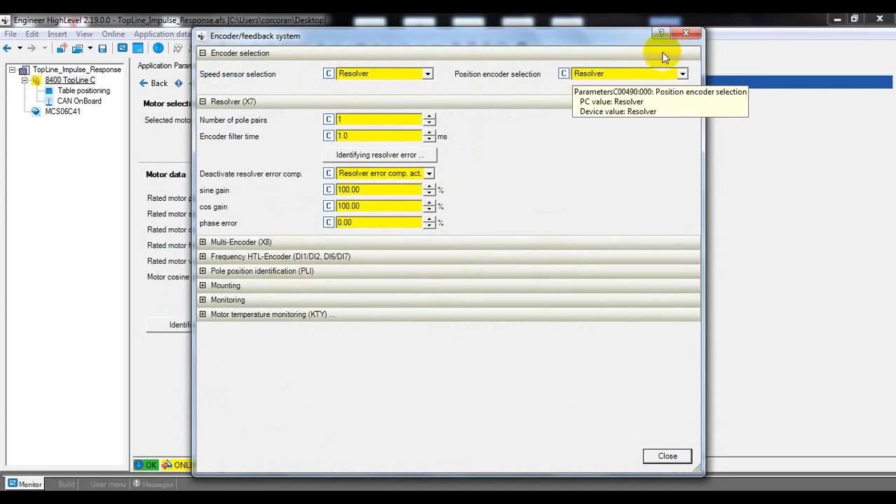So now I want to go ahead and set up my oscilloscope. You're going to see something similar to what I have here. This is a capture with the gains that we currently have. How I set this up is I went down and picked motion control kernel, speed set value A, and motor interface, motor speed actual. I set these up to be 100 RPM per division. It depends on what you have for your actual RPM, but these should match such that they overlay.

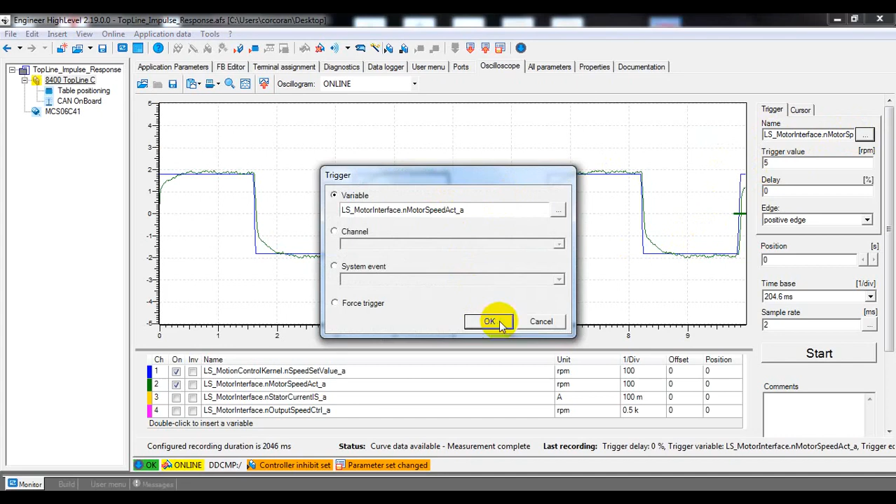Also, you want to set up your triggers. It's not necessary in my case with the repetitive movement, but if you have single, one-shot moves, you'll want to set up triggers such that you capture the movement. You do that up here. You'll pick the variable you want to trigger off of. In this case, it's speed actual. And your trigger value, I picked 5 RPM. It could be whatever you need. And change your edge. So when I'm passing 5 RPM in the positive direction, that's when I trigger. Also make sure you set up your time base and sample rate reflecting what you need.

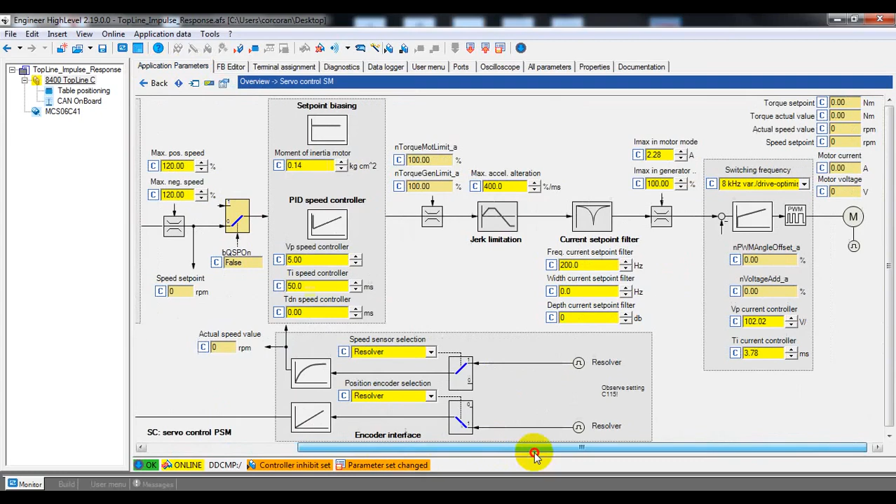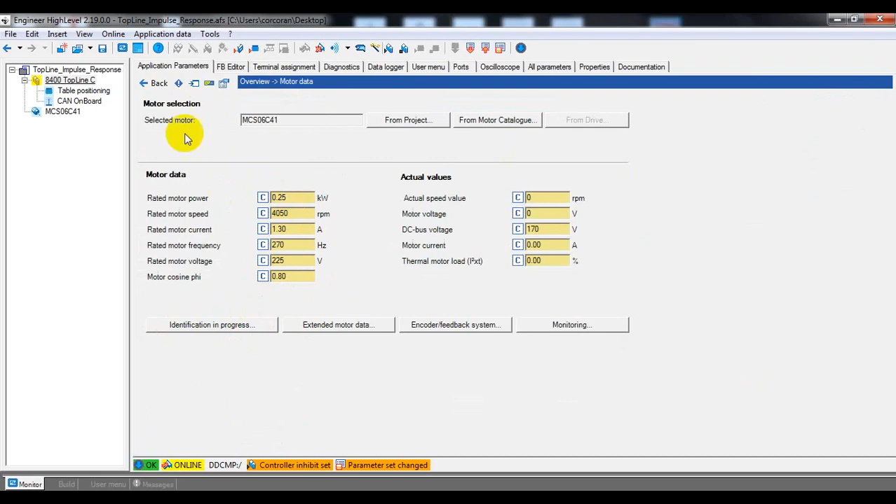As for the gains, they're under application parameters and servo control. If you scroll to the right, you're going to see VP current controller and TI current controller. These are for your torque controller gains. If you have a Lenze motor, you don't need to do anything here, those are already done for you. If you have a third-party motor, after you've entered your motor data, you do an identification. This will read the values off of the motor and input them for you into the torque controller.

So now back here, torque controller is done. Now we want to look at the speed controller. That's right here, the VP speed controller and TI speed controller. These are what we're going to focus on. Right now it's 5 for your VP gain and 50 milliseconds for your TI gain. Let's see how it runs. We go to the oscilloscope and start. You wait to see wait for trigger. Now I can enable the drive and run my application. It captured, so I'm going to disable and load oscillogram.

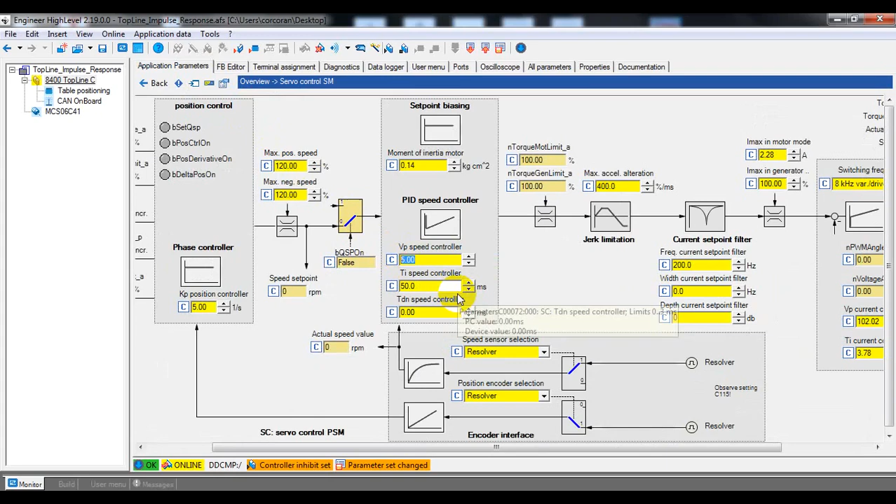You can see it didn't change a whole lot. This is pretty much what I had before, but that's what I wanted to see. You can see that it's a pretty weak signal. It's not reaching the set point, the blue line, when it should be. The green line here is kind of lagging. So we want to go back to our gains. I've done this before, so I know I need to increase my P gain. When you do this, you'll have to increase yours as well. Go back, run my oscilloscope. Start my drive. Begin the application. Disable. And check the oscilloscope. You can see it get a little bit better. It's fair. So let me go back.

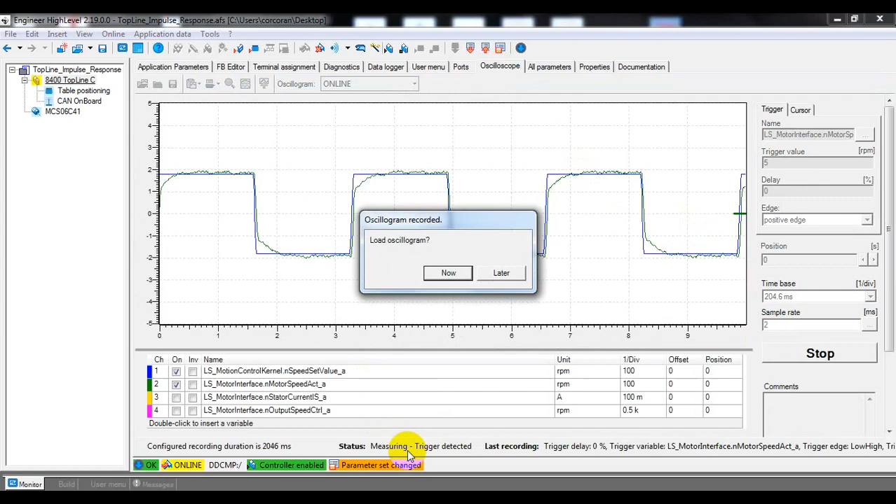And let's instead drop this. This is a fairly large value, it's default. This is your TI, the I gain. Let's start off with 25. Let's reduce it by half and see what it does. Go back to your scope, start, wait for the trigger, enable, run the app, disable, and load. That looks a lot better. You can see that we're getting closer to the set point.

Let's reduce it even more. Let's go down to 15. Start, enable, run the app, disable, load the oscillogram, and you can see it's much, much better. In fact, this is pretty much perfect. What we did was we increased the P gain and we decreased the I gain. These were default values. You may have to increase your P gain until it becomes unstable, reduce it by 10 to 15%, and then increase your I gain until it becomes perfectly stable again.

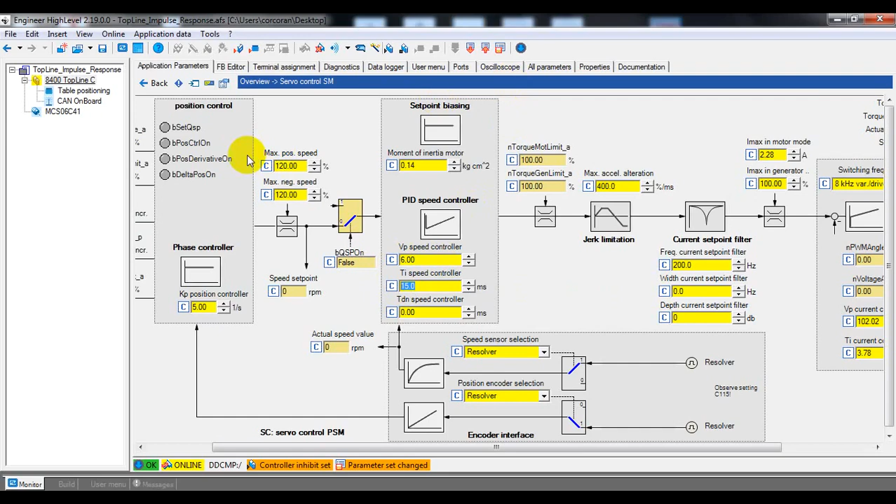At this point, I don't have anything else to show. All tuning situations are different, so please feel free to experiment and try different things, and use the oscilloscope to tell you how they're actually acting.